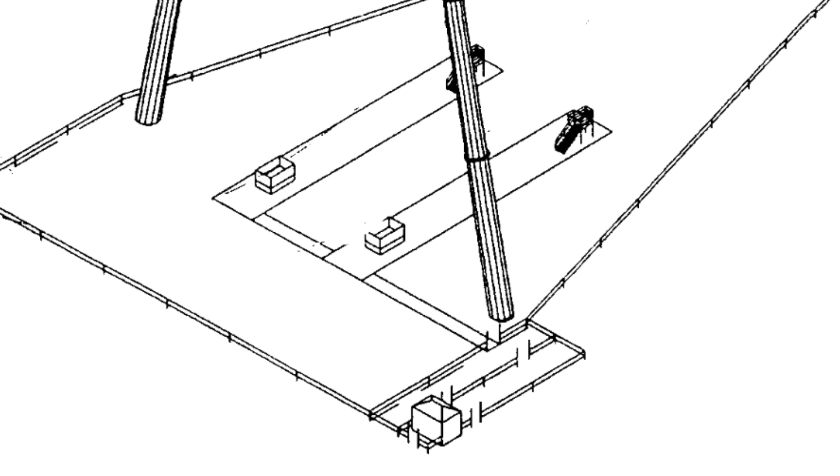Once you go up these stairs, they're either a set of rolling stairs. Ours had rolling stairs, so most of this video I'll reference the stairs a lot. Or some of them use a hydraulic scissors platform to lift up in the center. And it attaches to a set of steel cables that go all the way up to a giant lattice or arch frame looking thing that supports the weight. Once you're hooked up to that, you're hooked up to another cable that goes to a back tower.

This is going all the way up and over the back tower and back down to a hydraulic winch assembly. They will either lower the scissor platform or pull the stairs back out of the way of the riders. And then that area where the stairs were, that is called the zoom zone. I'll probably reference that later as well.

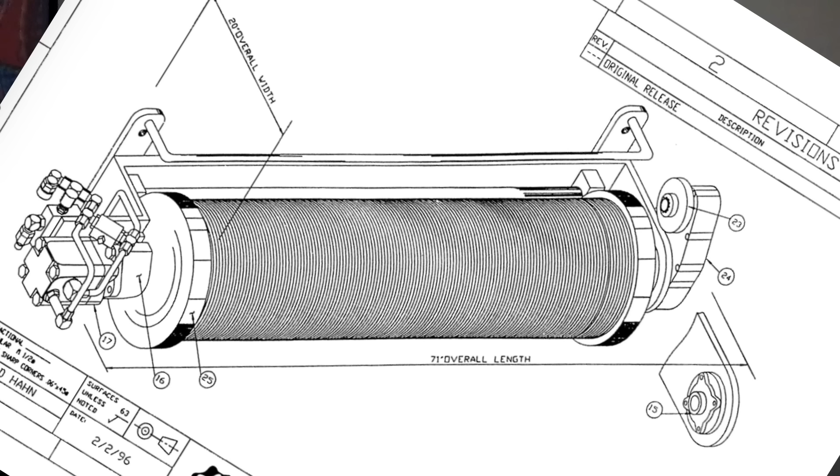Once the riders are ready, they will go ahead and winch up the riders. Like I said, on the back tower, there's a hydraulic winch package, much like you'd find on a full-size roller coaster or something like that. And this winch will lift the riders all the way to the top of the back tower. Now, once the riders are up there and they've stopped, the flight crew will yell at them and say, okay, 3, 2, 1, fly. Fly. And then you're supposed to pull a little ripcord on your flight suit.

Once you pull that ripcord, you actually cut away from the back tower and you experience pretty much a free fall for a little bit, and then you start to swing out. And then once you swing out in the front, you swing back and forth a handful of times, and then the flight crew has to come out, and what they'll use is what's called a lander, so you can grab a hold of something and it slows you down and prevents you from just sitting there and penduluming forever waiting to find the low spot of the ride.

So you grab the lander and that stops you, and then they go back out with either the stairs or the hydraulic scissors lift it back up, set you back down, unclip you, and then you go back to the flight suit area and take your flight suit off. You've just ridden a Skycoaster. Pretty cool, right?

Okay, so groundwork. The groundwork area of a Skycoaster is typically fenced off all the way around. They don't really let people walk through the middle of them because Skycoaster is always worried about something coming off of people. So they don't like them walking underneath the Skycoaster, but it's not unheard of. I've seen other installations where they did that. They left the area just underneath the center tower closed off because Skycoaster requires that. Again, that area is like your infield to a ride. They said we don't want anybody in that area.

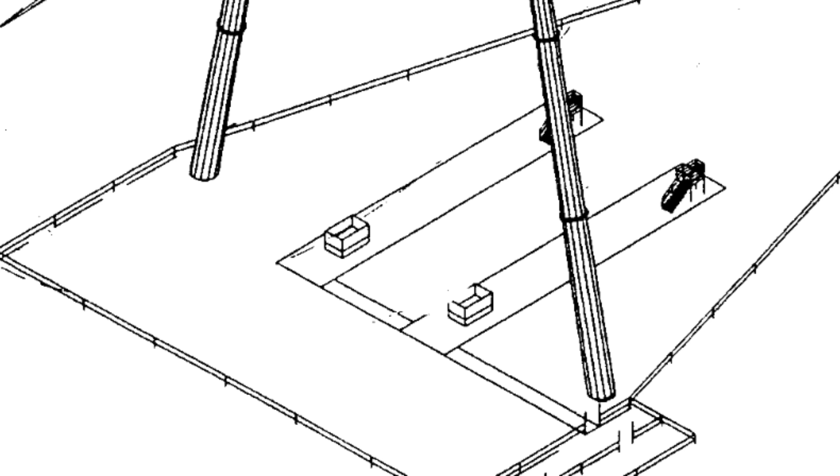And then inside that perimeter, there is a small, narrow little strip of land that's sometimes marked off with yellow or red stripes. I believe per service bulletin there were supposed to be red stripes on the ground. That little box, that rectangle, outlines what's called the zoom zone. The zoom zone is where you and your friends, because a Skycoaster can hold up to 3 people per side, are actually coming the closest to the ground.

That is the closest point to the ground where it is also the most dangerous for anything to be there. So the zoom zone is a special outlined zone where nothing lays, nothing sits, nothing's around that area. While you're being winched up, the attendants have to make sure nothing gets in or around or can come into that zoom zone while you're being hoisted up to the back tower.

Now, speaking of towers, the variations of Skycoasters out there, there's different heights and there's different configurations. A lot of them use an arch for the front tower. The front arch is typically a lattice, which is a bunch of pipes or a bunch of L-beam bracket type looking things that are put together to make this giant archway. Now at the top of the archway, depending on your size, most of those big archways have 2 flights that could happen off of either side.

There is a total of 6 cables up there. There's 3 cables for one side, 3 cables for the other side. Those 3 cables have names, we'll get into those. But basically those cables are what you're suspended from. And then on the back, depending on whether you have a 2-line model where you can run 2 different flights side by side with each other, or a single line model, there is the launch tower on the back of the ride.

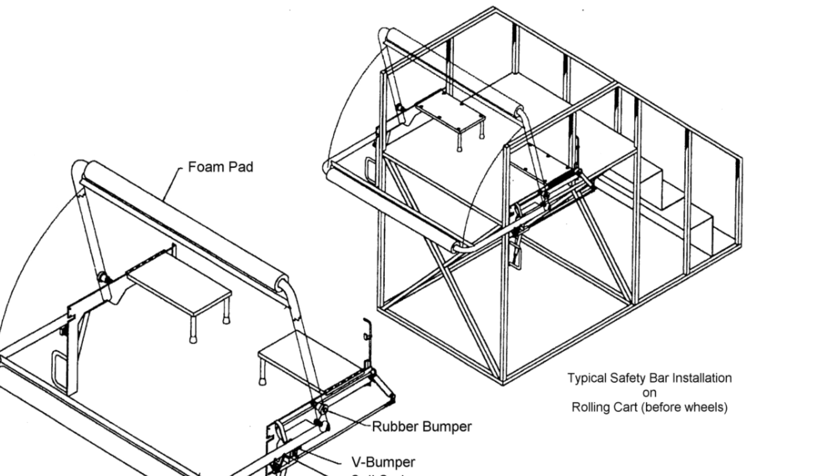Like I was saying earlier, most Skycoasters use a set of rolling stairs. Another set uses a scissors lift style lift that comes up in the center. Both have their ups and downs to them, quite literally. The scissors lift has much more inspection to it because it is basically a man lift that's embedded into the ground.

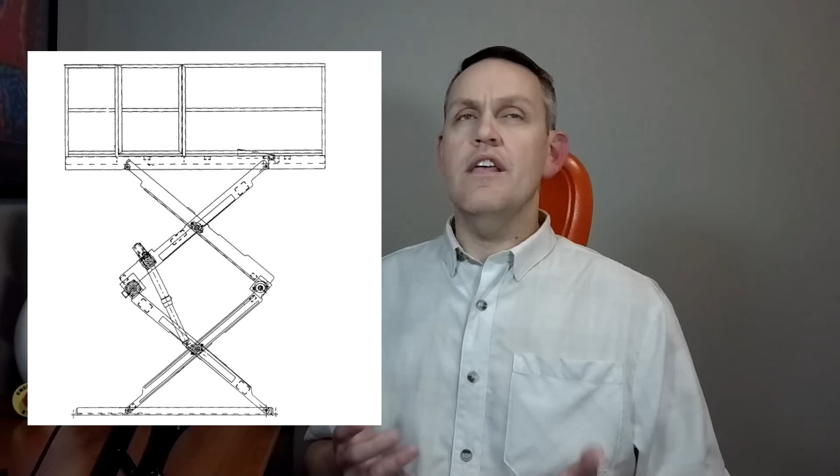Now, these things come with their own certification and their own criteria, so there's a lot of stuff that goes on to that. The majority of times a service bulletin came out for the Skycoaster, it was regarding the scissor lift because it has all sorts of little pinch points and things to NDT and inspect, and every time the scissors crossed each other, there was another thing to go wrong on that.

Now, the scissors lift had to be monitored so that it would not allow the flyers to be winched up while the scissors lift was in the up position. Because again, when you're screaming through that zoom zone at the end, it would be catastrophic if that were up. So there's sensors that monitor and make sure that scissors lift is in the down position.

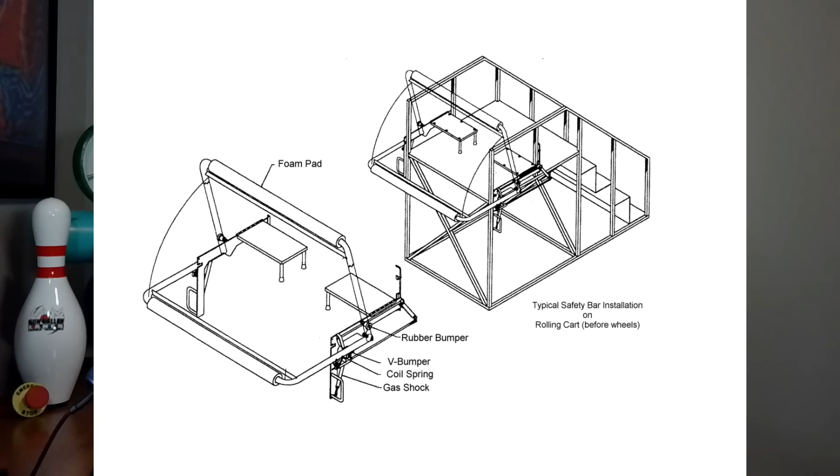Now, the rolling stairs, what I have the most experience with, those rolling stairs, they had the same thing. Now, they were a solid structure on a four-wheel track down at the bottom. That's all they were. It was like a set of railroad tracks that ran out to the center of the flight line. The flight line is basically where you load and unload guests.

So those solid stairs would sit there, and then you would load people up, and then you would take the stairs and push them back forward towards the front of the attraction. Now, the stairs would leave the zoom zone by about 10-15 feet, and then the stairs would park right there. This was a 100% manual process. This was not automatic. There was no motors. There was no nothing else.

It was simply just the attendants would push the stairs all the way from the flight line out to the other side, and then once the stairs were all the way back, they would take a manual strap and hook it to the post nearby to make sure the stairs couldn't roll forward.

On top of that, or I should say underneath that, there is actually two limit switches underneath there with little cam arms on them, so when the stairs went all the way up towards the other side, those limit switches would push down. Once those switches were made, that again allowed your flight to be lifted up to the back tower. Yeah, let's talk about controls right here while we have this.

All right, since the whole thing is hydraulically powered in the back of the ride, it has a hydraulic power package back there, there's only really one set of controls, and that's up at the front of the flight line, out of the zoom zone to where no one is standing up there.

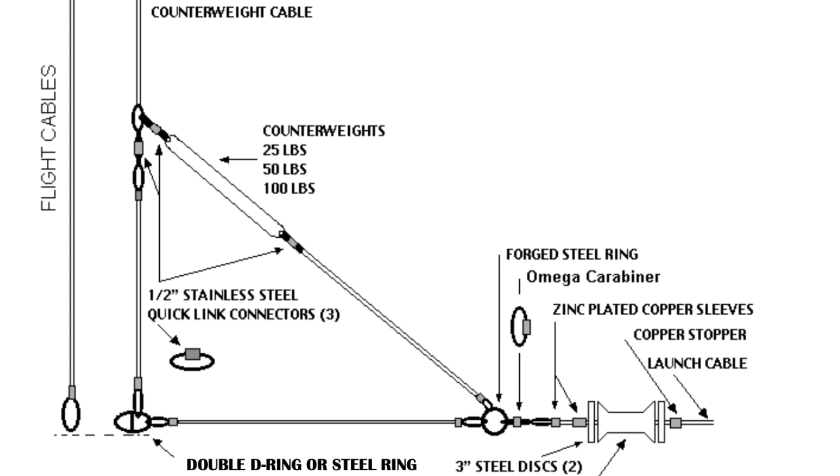The counterweight cable comes down and it attaches to this triangular cable setup that's called the launch bridle. The launch bridle is a three component, it's a triangle, and it connects to three things. The counterweight, on the counterweight cable, it's connected up there. It connects to your flight suit, not the suit itself, but the launch bridle is what's actually connecting to the suit. And then the other side of it connects to the launch cable that goes up the back tower. So you have 3 points on there, but those 3 points together make what's called the launch bridle.

The way it works basically is your flight cables come down and they connect to some carabiners which go to the back of your flight suit. It's basically right behind your back right there. Those hold you. Then on the other side, you have the launch cable and the counterweight cable. Those connect to your flight suit as well, but they connect via the 3-ring release system or the launch release system. Basically this guy right here. This is a 3-ring release system. It's homemade. You want to see how I made it?

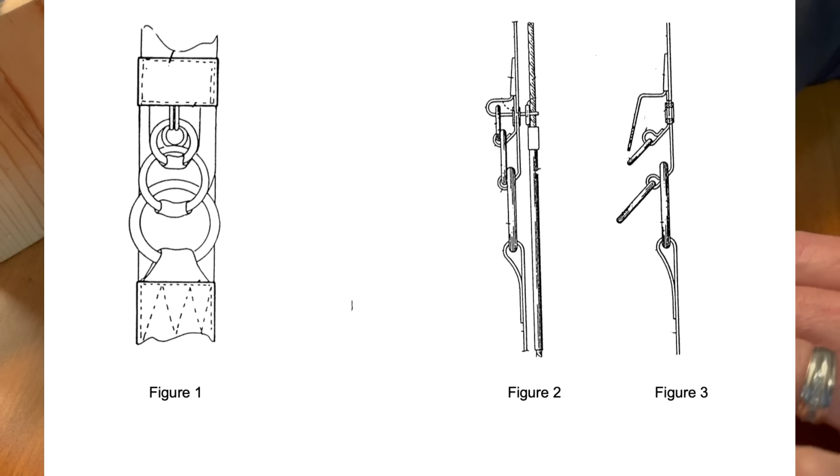Watch this. Okay, I'm going to make a quick release. And for this, I've got some webbing, and then I got some rings. These are just some key rings, but they'll do. Just cut this guy in half. Like that. Fire. Fire. Basically what I'm going to do is I'm going to fold this over, and then I'm just going to use some crazy glue right there just to hold that guy down. Just like that. And then basically that's going to fold over. And as it folds over, you're going to want another one through there that basically folds over like that.

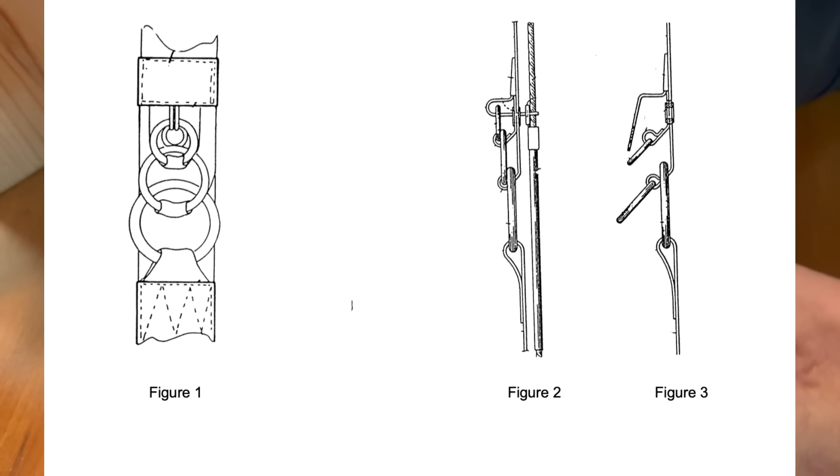Here's my launch end, and here's my other end right here. I put the nice little, what do you call that, rivet in there. Anyways, next is going to be this little guy. It's just a piece of paracord. It's 550 paracord. And basically all I'm going to do is put that in a nice little U like that and just give it enough to loop down. Now the last thing that's going to make this work, I'm just going to use a zip tie because that's what I've got handy, but in reality it's called the rip cord or the release cord that's set up through there.

I can't remember how it's fished through there right now, but basically I'm going to try to hook this up here. So this is the launch cable that comes down. And this is the part that's actually on the harness itself that you're harnessed up to. So this guy should come through here. That's hooked up through there. This one is hooked up through there. And then that little green cord goes over the top, down through that hoop in the center. Now I poke it over the back, and basically this guy comes through here like this.

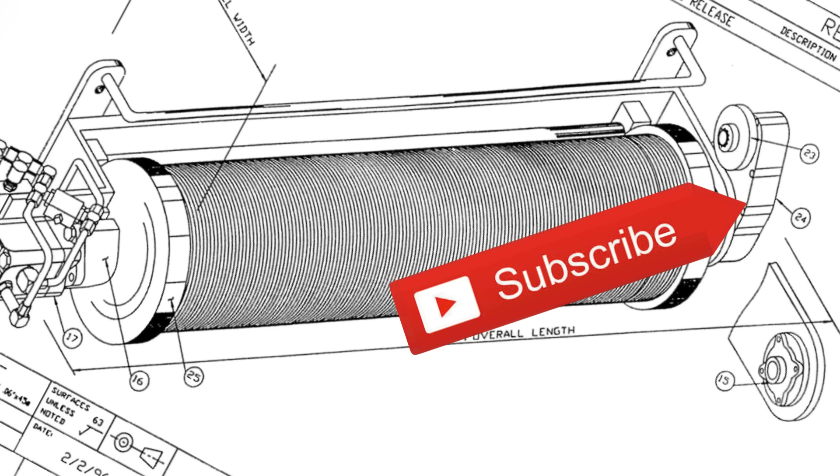So on the side of the drum assembly, they put a gearbox, but they did it backwards. So a little bit of movement into the gearbox would create a lot of movement at the output. And on the output, they put a mechanical governor. It's basically just a clutch that you would use on a go-kart or something like that. And they put that clutch there, and it's got centrifugal weights on the inside. And they basically said, as long as it's going its max speed or whatever it's supposed to do, those weights won't come out and they won't engage the outside. The outside was just anchored with a big U-bolt on it. That was it. There was nothing else there.

But say you broke that thing and the drum tried to go runaway, those centrifugal weights would come out and basically grab against the outside, and through all that mechanical reduction, it would slow that drum back down. Not slow it down a lot, but it would slow it down to prevent a catastrophic runaway. So that's the overspeed clutch. That's a really cool component.

Okay, let's talk about the suit you wear. The suit is a harness/suit. That's what Skycoaster calls it. Like I was saying in the beginning, it's made like a paragliding or a hang gliding suit. It's meant so you lay down on it.

Skycoaster has changed variations of this as well. They've made sitting chairs and a couple of other things out there that you can fly on now. But the suits are also really heavy duty. They're meant for one person at a time, but you could hook up to 3 of them up to the launch. They're actually made by a parachute company, so this company really knows what they're doing, and each suit can hold up to 10,000 pounds of weight.

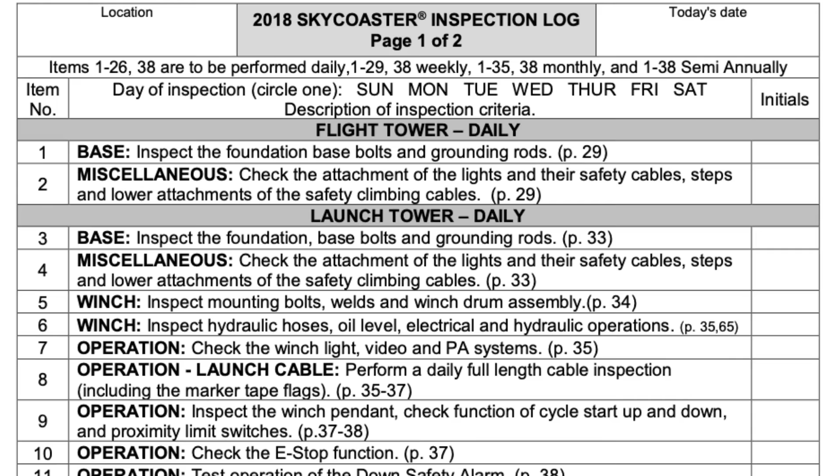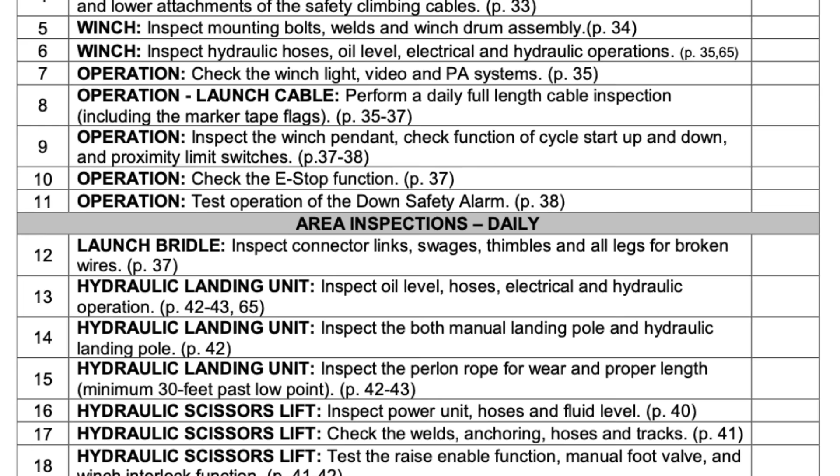Now, when it comes to the flight suit stuff, that's my weakest knowledge on there. A lot of people are like, wait a minute, if it's so important, how come it's your weakest knowledge? Well, let's talk real quick about the inspection of a Skycoaster. The inspection is done via mechanics that do all the stuff like the front tower, the rear towers, the flight cables, the launch bridle, the stairs, the scissors lift, the hydraulic power package, the surrounding area. All that is done by mechanics. The flight suit and all the flight area components is actually done by operations.

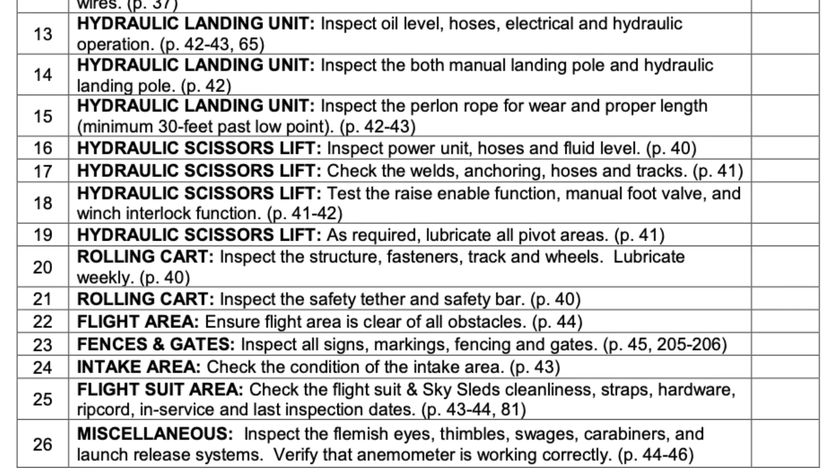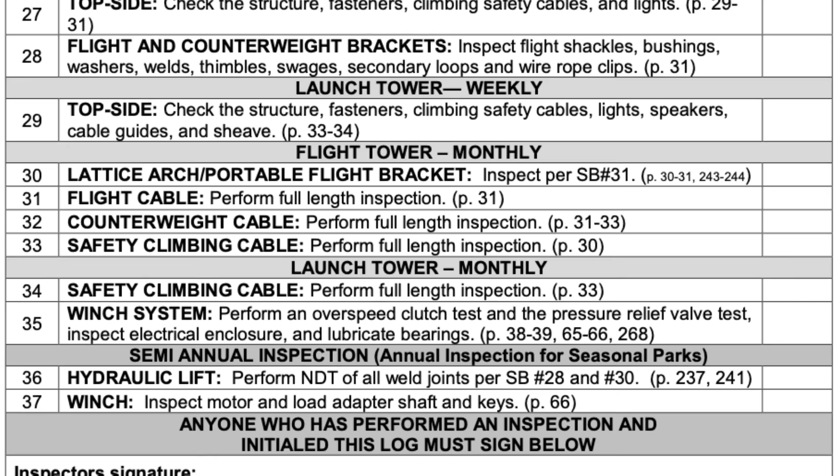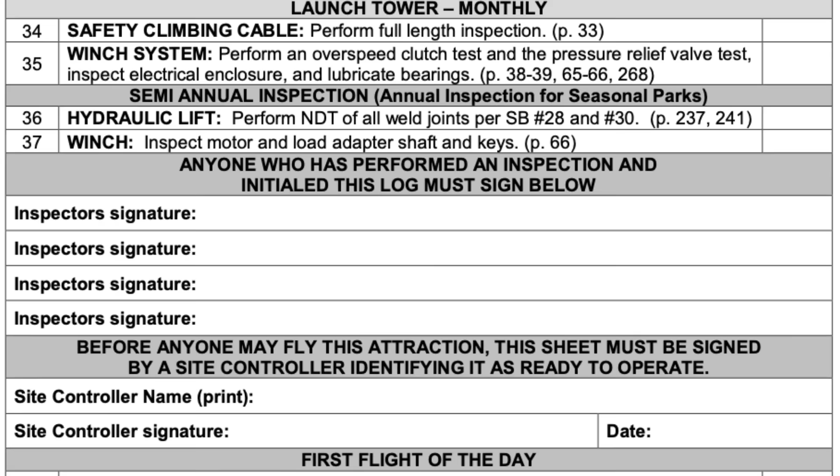Now, it's not just operations, it's actually someone specific that was certified by Skycoaster to go out and do those inspections. So the park actually can't really say, oh, we're just going to train anybody on this ride all the time. There actually has to be a representative from Skycoaster there doing the training. That representative, if I recall properly, is the site controller. The site controller is the representative of Skycoaster.

This is a person, like, they were an employee at our park, yes, but every year they had to go back for training to Skycoaster. They physically had to go to an external place to Skycoaster and do that training. So then that person came back, and then that person can oversee training of everybody else. They oversee the operation of the Skycoaster and make sure everything is being done to Skycoaster standards. Remember, Skycoaster kind of owns the ride. They're just doing a profit share program with the park. So it's this really weird little category of this thing out there.

So once they winch you up to the top, you're winched up to the top. The cable comes across the drum, and as it winds up, it says it's going, then it hits its high limit, and it says, all right, I've stopped. That's when this guy comes back into play right here. This is your 3-ring quick release. If you're ever wondering, this is the exact same quick release that's used on a parachute. So what I found out is that the parachute uses these in the emergency cutaway.

Like when you pull your parachute out, I'm sure people have seen this in movies and stuff. The main parachute gets twisted up or there's a problem with it, and they say you have to cut away and go to your reserve chute. When you cut away the main parachute, it's actually being held up by the 3-ring release system. And when you pull the 3-ring release system, you pull that cable out of there, which is attached to your ripcord on the side of the flight suit. Once that comes out, this little tiny piece is released right there, which opens up that bigger piece, which opens up that bigger piece, which allows the whole thing to come apart.

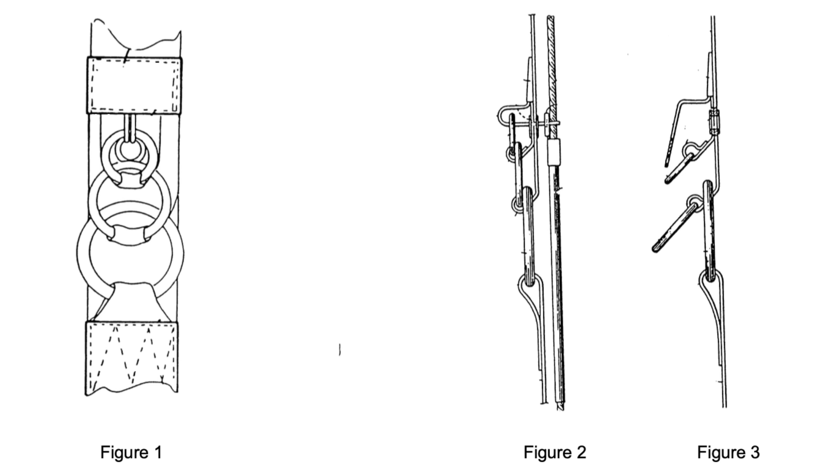Okay, so that's the 3-ring release system. As always, I forgot, like I typically do. Anyways, we want to talk about the manual lander real quick. At the end, while you're swinging down at the bottom of the ride, you have to stop. Well, it would take forever if you swung to a stop. So actually what they use is something called a lander.

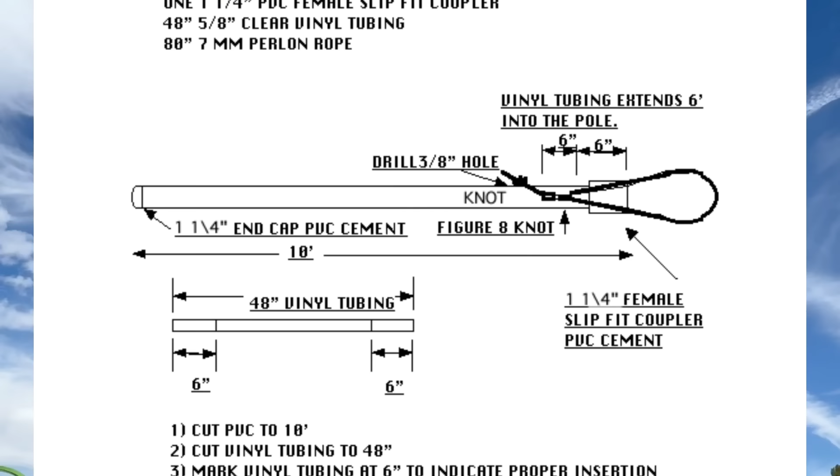There are 2 types of lander. The first type is a manual lander, which is a piece of PVC with a loop on the end. That's where you grab the loop and the people literally pull you to a stop to cancel your momentum. The second type is what most rides have. It's a hydraulic lander. The hydraulic lander does the exact same thing, but instead of a person using their momentum to slow you down, you're actually pulling against a hydraulic motor.

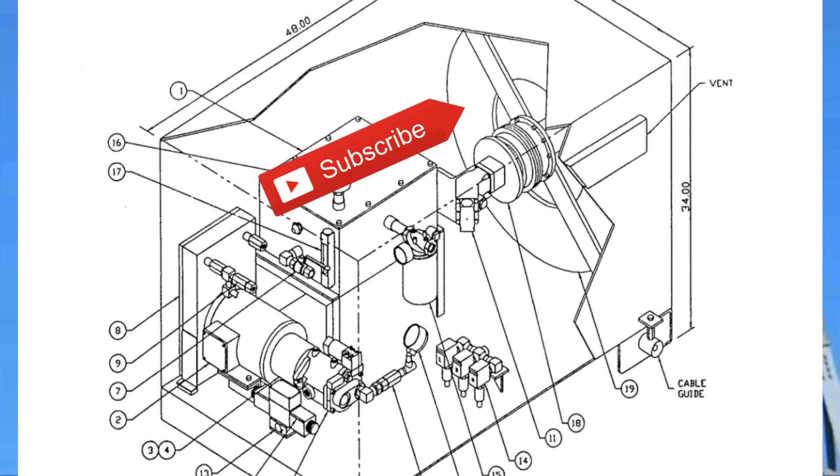Now, realistically, you're pulling against a valve that's set for weight. There's a low, medium, and high. The valve puts resistance on the drum that the rope is wrapped around. The rope is just a piece of, I believe it's 5/16 climbing rope, just regular rope inside there. But the drum puts resistance on it to the point where it will slow you down and bring you back

to a stop. And then once you let it go, the hydraulic motor turning on the inside will actually automatically wind that rope back to the inside of it, and then the lander is ready to go for the next time. So a critical step. Most people use the hydraulic lander just because it's very easy to use. The employees don't have to do anything.

But if that fails, or if it's a smaller operation, they'll use the manual lander, and then you're literally catching people with yourself, which could be dangerous if you have a lighter person catching 3 people. So that's why most places tend to use the hydraulic lander.

Let's go into some of the inspections for maintenance. Daily, the entire tower has to be inspected. The front tower, the back towers have to be inspected. This could be done via like binoculars. You can just look at it. You don't have to climb up it on a daily. If you ever see any problem or suspect there's a problem, then you have to climb it. The flight cables are visually inspected every single day, and they're physically inspected once a week.

Now, physical inspection, what does that require? That requires that while you're doing your climb up to the upper lattice or the top of the archway up there, you physically pick that cable up and hand over hand go through that cable the entire time. Now, I've gone through cable inspection a lot, but this is the infamous part where you would take the cable and per Skycoaster, you'd wrap a rag or pair of pantyhose around it and then pull the cable through it and make sure there's no little frayed ends coming apart on there.

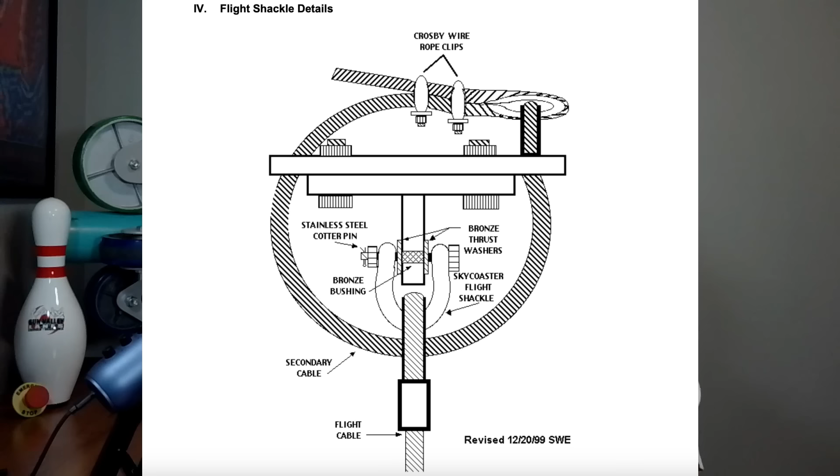Now, the difference of inspection between that monopole and the lattice, that's where these two differ. The lattice ones have a platform sticking out from the top where you can go up there, and that's where the cables are attached. So you can get on the platform and you could look right underneath there and you could see the cable attachment points. You could see the cable safeties, because the cable at the top has a safety wire that goes through it. It's another piece of 5/16 cable.

Go figure. It goes through the eyelet in case the supporting shackles were ever to come loose, fall off, break, whatever it might be. You have another cable holding it on just as a safety. But on a monopole, it's not as simple as just going up there and looking underneath it. The monopole diameter is roughly 3 feet thick, and then the cables are underneath that. So in order to inspect those mounts and everything on the bottom of a monopole, you have to go up there and do this Mission Impossible over the side while somebody else is there watching you, and you have to go and hang underneath and look at it upside down.

It's really, really not ideal at all. If your Skycoaster is small enough to where a man lift can get up to that, great. Then you can use a man lift and get up there. Ours, we had a big man lift that got up there and it just barely didn't make it, so we put our man lift up there and got it as close as we could, and then we literally had to use a ladder on top of the man lift to physically touch the bottom to where we could undo it and replace it.

You talk about sketchy? That was sketchy. That was it right there. It was like wear your orange vest for sure, because that was sketchy. But it was kind of the same pain in the butt, a little bit easier. Some thought it was easier, some thought it was harder than hanging underneath the thing and then replacing and moving the cables around from there.